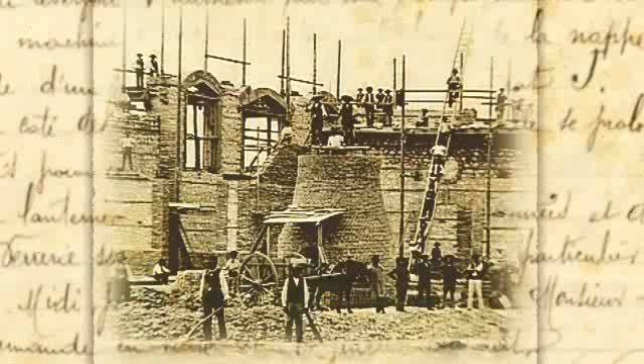A few months later, in front of a crowd of more than 8,000 people, Jean Jaurès inaugurated the Workers' Glass Factory in Albi, France's first workers' cooperative. In December, the first bottles were blown. The glass factory opened autonomously with its own equity.

It grew fast, but freedom has a price. The employees sometimes had to give up part of their salary when business wasn't so good. Despite that, the know-how and solidarity of the workforce kept the company afloat. After the Second World War, VOA was started up again by Maurice Thorez, Vice President of the Council of Ministers. With a burst of popular enthusiasm reminiscent of the fervour of the company's beginnings, the factory was back on the rails again, loyal to its values.

The company's motto is work, capital, talent. Nowadays, as you know, glass is no longer considered as a receptacle, but as a packaging. Glass has a highly promising future. In 1975, the plant was built on its present site. VOA was the 4th largest producer of bottles in France. In 1998, it became a full subsidiary of Saint-Gobain. Modern and efficient, it produces 1 million bottles every day.

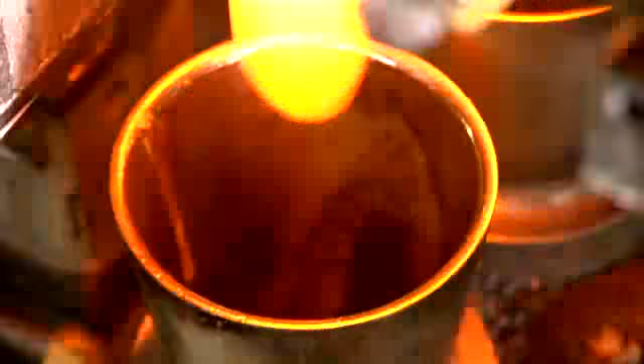At the furnace outlet, a feeder conditions the glass to the required temperature and conveys it to the machines. At the end of the feeder, a strand of molten glass is severed into drops called gobs. With perfect synchronization, a network of guide rails distributes these glass gobs to the various molds to form the bottles.

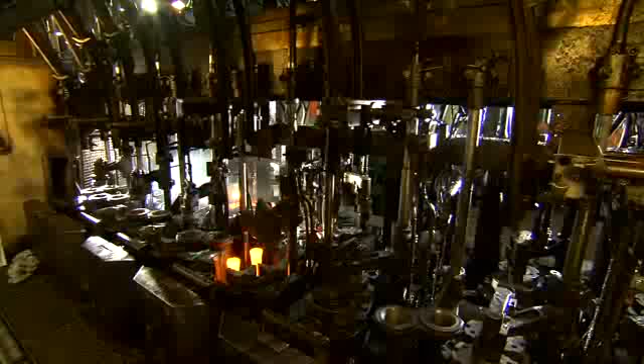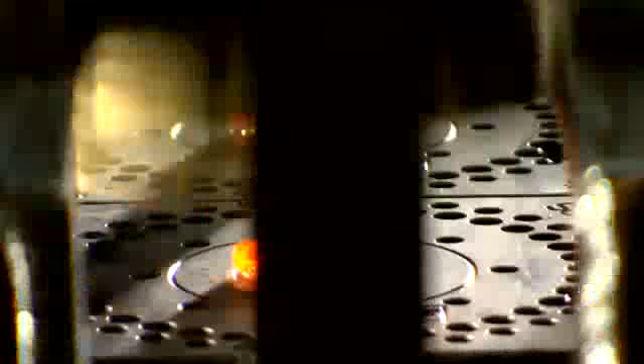A first mold in cast iron, the pre-forming mold, gives the bottle a provisional shape, the preform. Then the preform is transferred by an arm into the finishing mold, in which the bottle is blown into its final shape. To obtain a perfect bottle with no defects, the machines are continuously maintained and the molds are regularly inspected.

The bottle, which is still at a temperature of over 500 degrees Celsius, is then extracted from the finishing mold with tongs and put on a cooling tray before being conveyed. The whole forming cycle only lasts a few seconds. At this stage, the bottles have acquired their final shape. To guarantee their strength, they must be reheated and then gradually cooled in a tunnel furnace known as a reheating furnace. Scratch-resistant surface treatment is applied hot before they go into the reheating furnace and cold as soon as they come out. The bottles are now ready for a series of inspections.

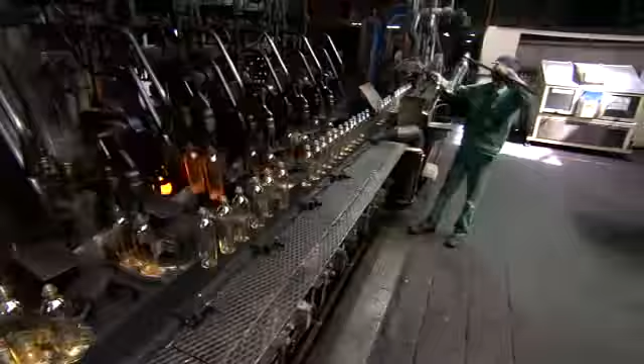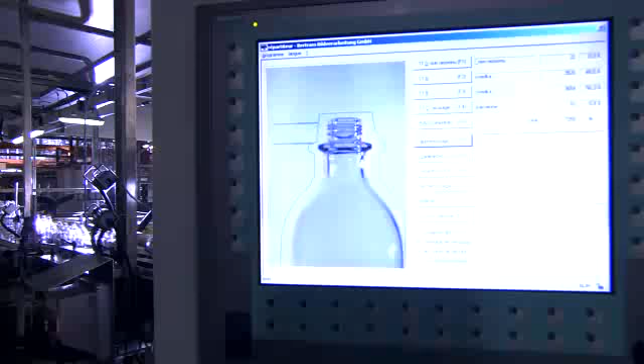To ensure the high quality of products, VOA conducts a chain of inspections throughout the production process. Manual control of sealing as soon as the bottles are formed. Visual inspection to eliminate flaws. Automatic inspections using high-tech instruments, video or light beams.

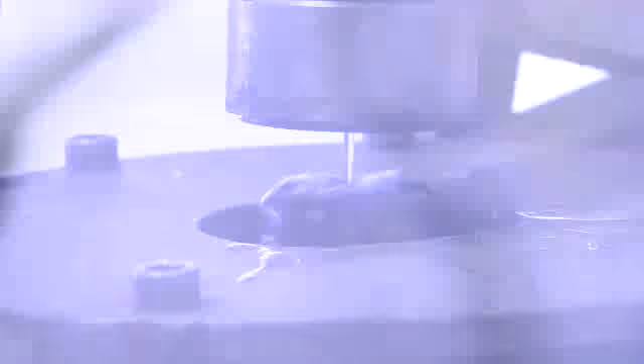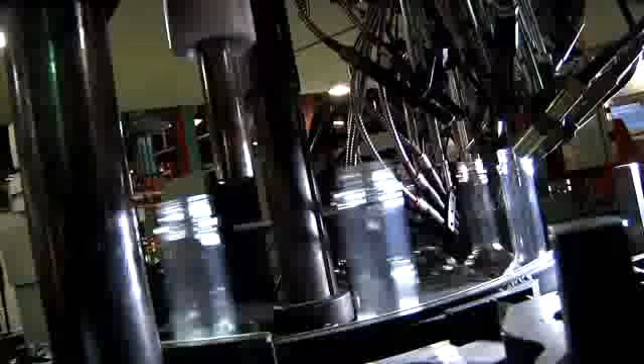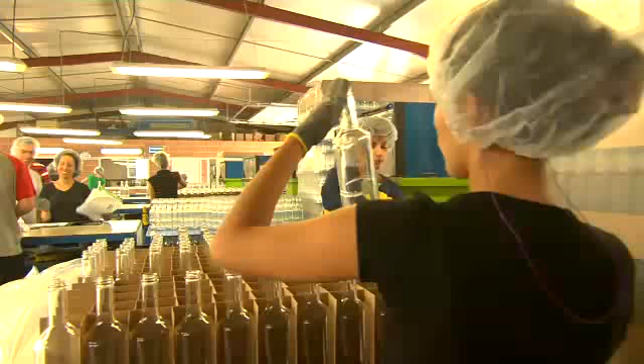In-depth laboratory tests are also performed for strength, detection of possible defects in the glass, and to check thickness and dimensions. This extensive inspection process guarantees safety of use, both for the bottler and for the consumer. The inspection staff are required to respect strict hygiene rules. All the bottles considered unsatisfactory are automatically rejected and then remelted in the furnace. The others are conveyed to the packing machine.

The bottles are conveyed to the automatic packer, which makes up a pallet, adapting the size and packaging of the pallet to the requirements of each of VOA's customers. On average, each pallet contains 1,000 bottles. The automatic conveyor takes the pallets to the wrapping phase. The wrapper is heat shrunk onto the pallet in the retraction oven. The bottles are now protected from humidity and dust.

Transferred to the plant's storage area or to regional warehouses, the pallets are now ready to be delivered. Destination: 1,000 customers in France and 20 or so other countries. Agri-food groups, merchants or wine cooperatives. VOA internal services are available to each customer. They can organize deliveries in less than 48 hours, launch very short production runs on a dedicated flex line, or provide exclusive offers like the Selective Line brand of very high-end wine and spirits bottles for export.

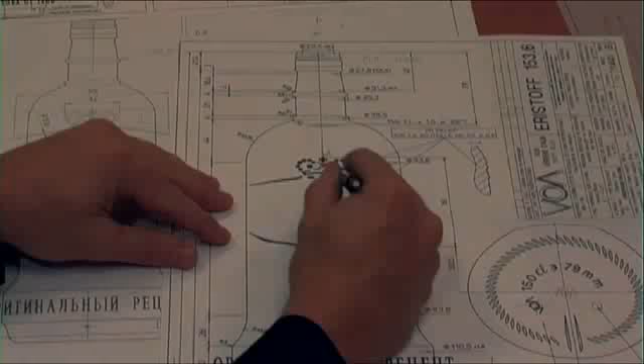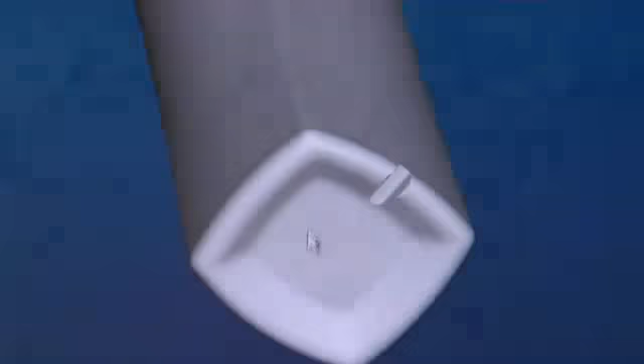For all these customers, VOA's Integrated Product Engineering Department constantly designs and develops new products. At the cutting edge of innovation, VOA has made continuous improvement a company value. It's the first glass company in Europe to win quadruple certification in the fields of quality, food safety, workplace health and safety, and the environment.

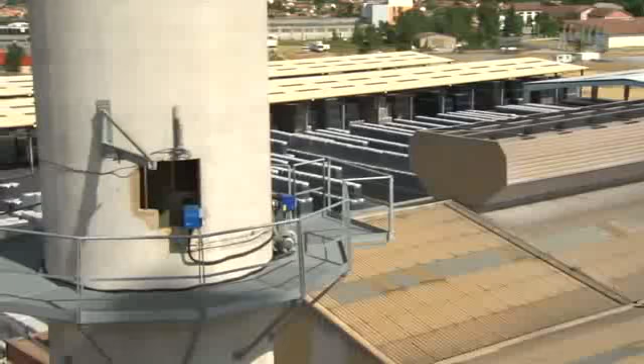VOA is committed to reducing its own ecological footprint by limiting its water consumption and processing sulfur oxides and dust. VOA has reduced its carbon emissions by 20%. For more than a century, the VOA Glass Works in Albi has remained faithful to the ambitions of its founders, continuously adapting to the demands of the times.